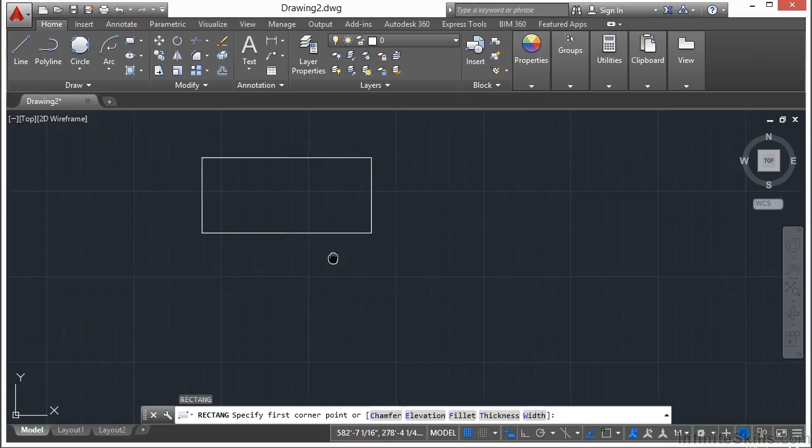We've drawn the rectangle command several times already. If I pick rectangle, pick my starting point, pick my finish point, there's a rectangle. You pick two points on opposite sides of the rectangle to create your shape. You can pick the command out of the ribbon, or type in rectangle, or just REC, and press return.

You pick your first point, then your second point. You can also define the lengths to make it exact, typed in similarly to drawing a line. So let's say I want it to be 24 inches, tab over, and make it 12 inches high. There we go—we've drawn this rectangle at 2 feet wide and 1 foot tall.

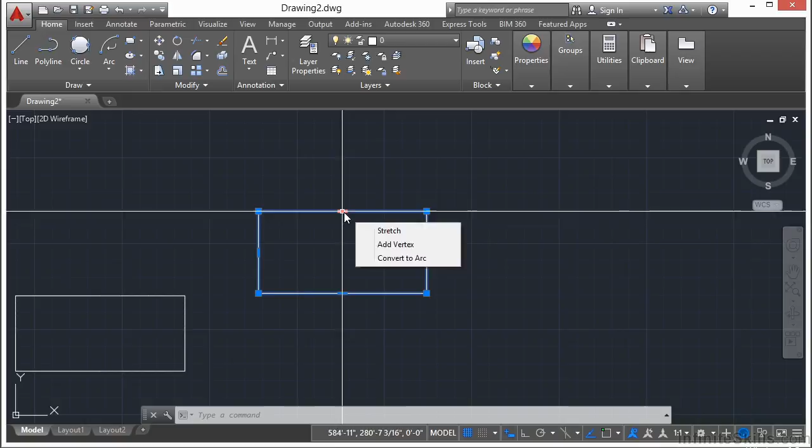You can see when I select it, my grips tell me that this is also just a regular polyline. Now there are some other options for the rectangle. If you notice here, you have chamfer, elevation, fillet, thickness, and width.

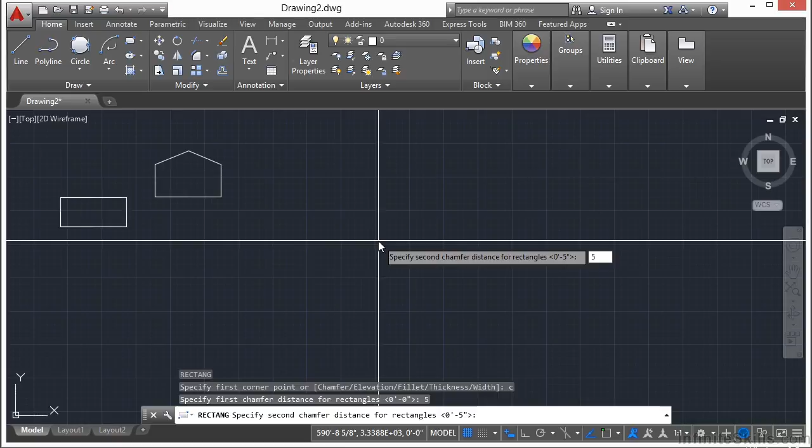To define the chamfer or fillet, you'll choose either the option C for chamfer or F for fillet, then type in the value. Let's use a chamfer unit of 5. We type in C, press return, type in 5, and then 5 again because it gives it a bit of an angle. Now I pick my first point, and it looks just like a regular rectangle until the box is big enough to have a 5-unit chamfer on the corners.

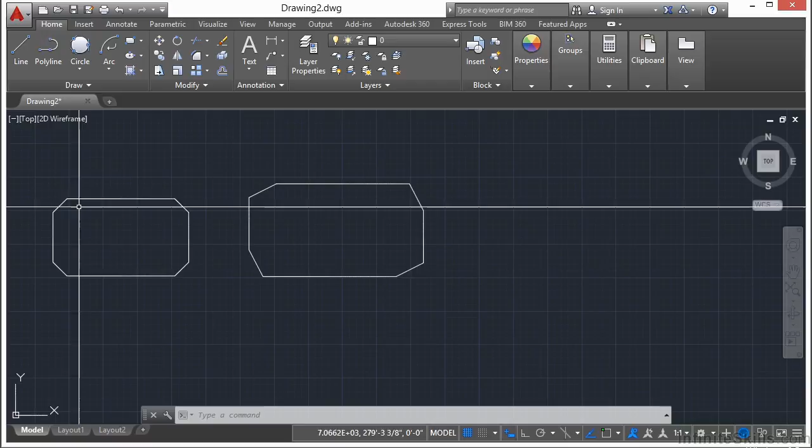That's a really cool trick. If I do this again and select C for chamfer, let's say I go 10 units and then 5 units on that chamfer. Pick my first point, and you can see I have a chamfer here, but it's a little different because one is at 10 units and one is at 5—it goes down 10 and then 5. Keep in mind that first number you pick will go across and then up, and here it goes down and then across, etc. You're going to get weird shapes, and typically you won't need something like this. It's not going to give you something mirrored or symmetric unless both units are the same, so you'll get kind of weird stuff, but if that's what you need, it works out perfectly.

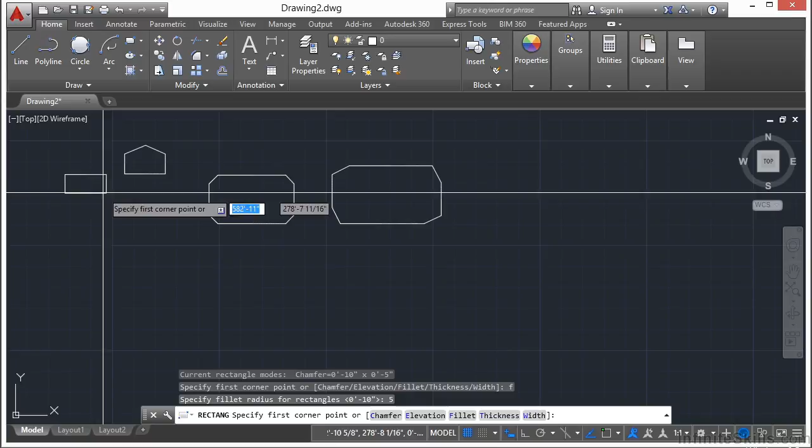Now the fillet option for the rectangle command works almost identically. You start the rectangle command, type F for fillet, press return, and enter a value—I'll enter 5 again, press return. So instead of notched corners, the corners are going to be round, with a radius of 5 units. That's the fillet—very simple, and it makes a nice little shape.

Rectangles are simple polygons, but you can get pretty fancy when drawing with them. So we start the command again and look at the options, and you see there is an elevation option. Well, that's for 3D work or for a thickness.

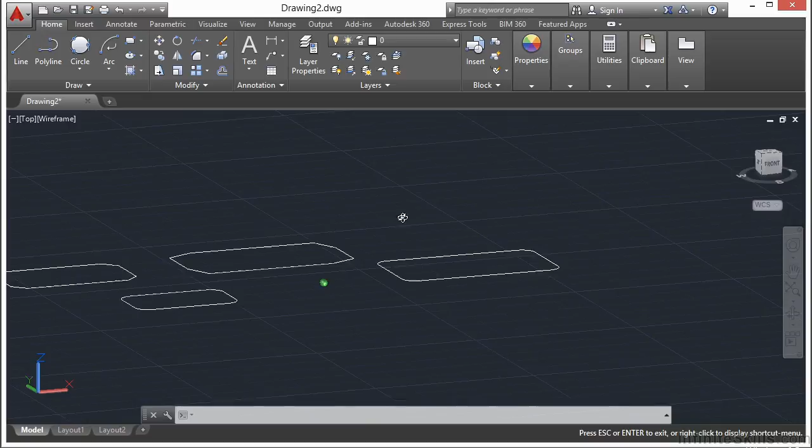If I type in E for elevation, enter a value of 5, and then draw my rectangle, zooming in here, it looks exactly the same. Well, it's not—it's at a different elevation, it's up higher. It's kind of hard to see, but if I rotate my view, you see all of these rectangles are drawn at an elevation of 0, while this one is at an elevation of 5. So that's just something else that you can do with it automatically.

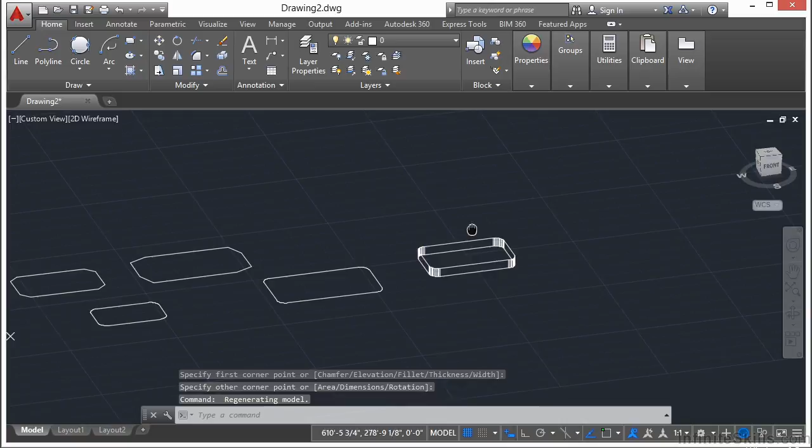Now my thickness option, I'm going to call it 5. And I'm going to draw a rectangle again. In 2D, it looks the same, but when I rotate, it's 5 units tall or thick. It's also starting at an elevation of 5 because I made that change earlier, so you have to keep that in mind.

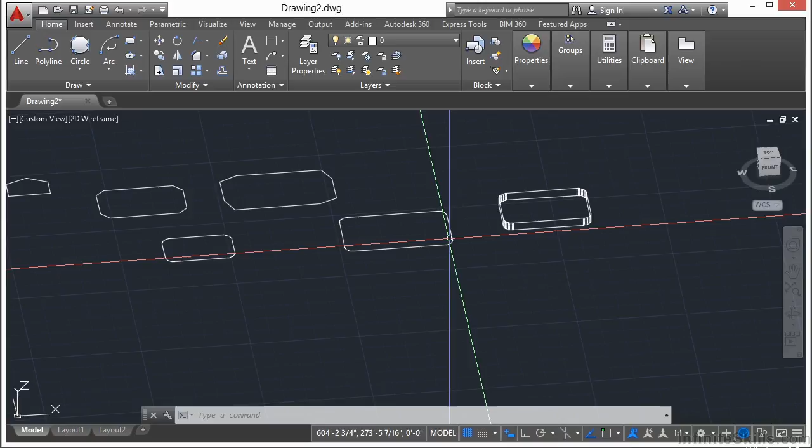Every little change I've made to the setting, I made a fillet for the corners, I changed the elevation to 5, and I changed the thickness to 5. It keeps adding to that. It remembers that. It keeps it the way that you had set it before, so keep that in mind. It doesn't reset every time you start the rectangle command.

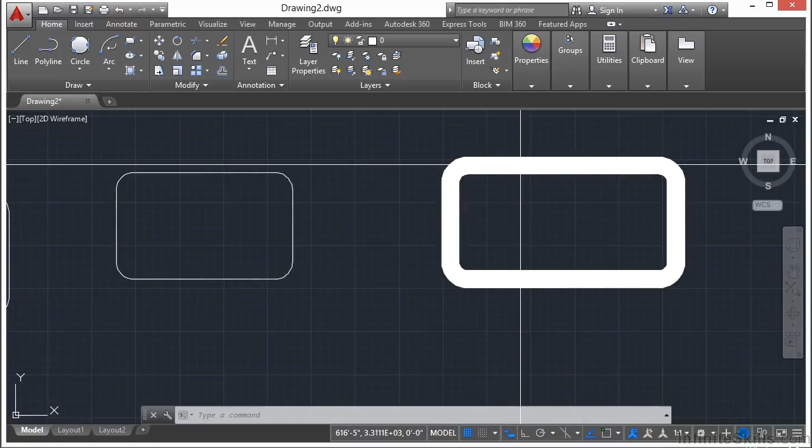On my last option, the width, type in W. Again, I'm going to use 5 because that number has been working so well for us. And I'm going to draw my rectangle. So now you can see here I have a very thick, fat looking rectangle with my rounded corners. And when I rotate, you can see it's 5 units tall, 5 units wide, and at an elevation of 5 units.

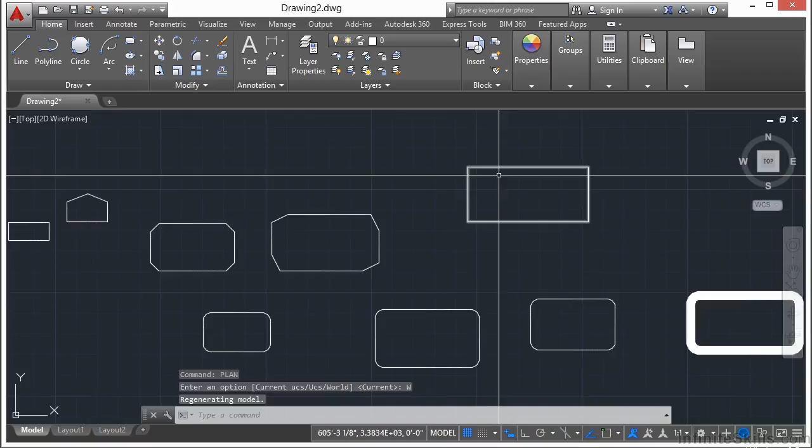So in order to reset all of that, I'm going to have to go through my rectangle command, go through all of my settings: go to my fillet and set that to 0, go to my elevation and set that to 0, go to my thickness and set that to 0, and go to my width and set that to 0. Now I have a regular, plain old, boring rectangle again. So there are a lot of things that you can do with a rectangle besides just a regular old rectangle.

Now let's take a look at the ellipse command. Ellipse is essentially an oval, and there are basically two ways to draw them. The command starts and you pick the center point, then you pick two other points. There are two other ways to draw it as well, but we're going to start with just the regular ellipse command. You can type in the word ellipse, just type in the letters EL for ellipse, or you can go up to the ribbon and start the command.

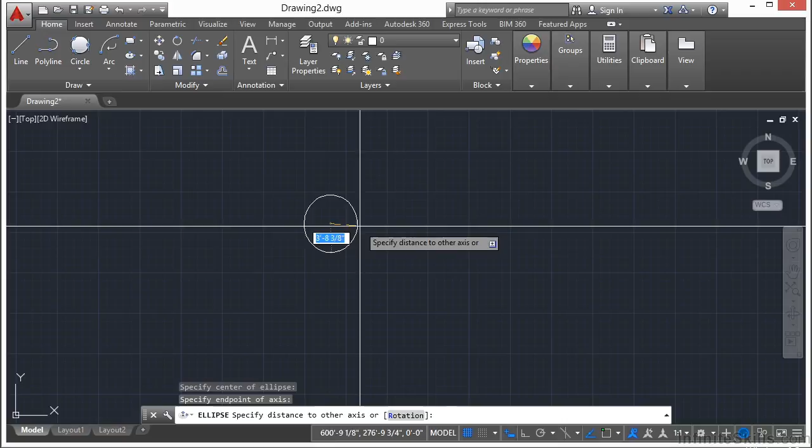First of all, it asks you for a center point, and then for a width point. Think of this as being a horizontal line - that shows you how wide it's going to be. And now you have to define the height. As you can see, as I stretch it, it goes from a circular looking object to a more oblong traditional oval. And that's it. It's very simple to draw.

Now, if I turn on my ortho command, press the F8 key, or if I click down here, I can draw a very simple, perfect looking oval. That's great. You can use this a lot if you're making piping drawings in a profile view with an exaggerated Y-axis. In civil design, you do this often, so I get to do this quite a bit, drawing pipe cross sections like this all the time. So that's one practical use of an ellipse.

Let's look at the axis and endpoints. So I specify my axis endpoints - that's my width, it skips the circle part. I'm essentially picking on one side and then picking on the other side. That's how wide my ellipse is going to be. And then I go to the height. Very simple. And then my other option here is the elliptical arc.

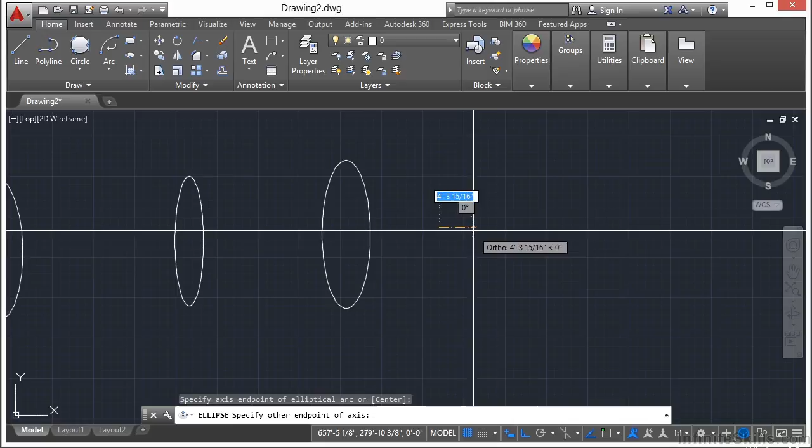Essentially, I'm drawing an ellipse, but I'm only going to draw an arc. So I pick my center point, my width point, defining how the ellipse is going to look. I'm going to turn off my ortho command for this part. Now I pick my start point, and now I'm drawing the arc length. So that's how you get an ellipse like that.

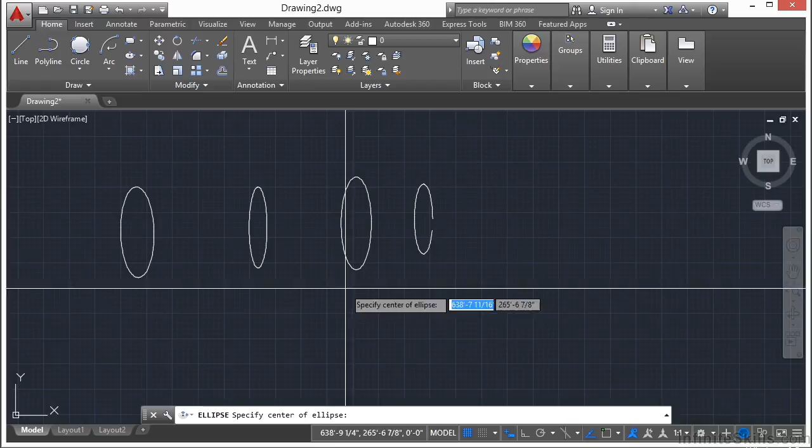Now the ellipse, keep in mind, if your ortho command is turned off, like I have mine off right now, when I pick my center point and then pick my width, it's going to be drawn at this angle - not perfectly horizontal or vertical. So it can be oblong like that. There are a lot of different ways to draw it, and it depends on exactly what you're trying to draw, the perspective of it, or what information you have at the time.